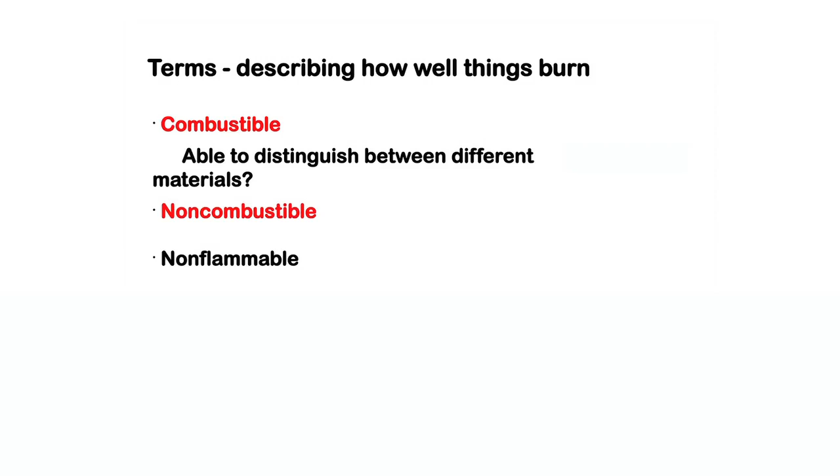So these are some words that people banter about. A material can be combustible. A material can be non-combustible. A material might be non-flammable. A material might be called fire resistant, ignition resistant, and with ignition resistant we have ignition resistant material and ignition resistant construction. Are those the same thing? And then this flame resistant.

What else have you heard in terms of describing the performance of a material to fire? Are there any other terms? Fire retardant. Fire retardant material. Fireproof material. What do these things mean?

So some of these you'll notice are highlighted in red, and the ones that are in red have definite definitions for these terms. The other ones, non-flammable, you might say, well, that's the same as non-combustible. But is it really? Because actually the definition of non-combustible allows some flaming. So maybe not. And then flame resistant, well, you sort of understand what that means, but when you look at multiple materials, how do you know what attribute to give to a given material? So we're going to talk about these a little bit.

Okay, so here's a question for you. Fire resistant and ignition resistant mean the same thing. False. Fire resistant and ignition resistant mean the same thing - we'll talk more in detail about this, but fire resistant and ignition resistant don't mean the same thing. They're different.

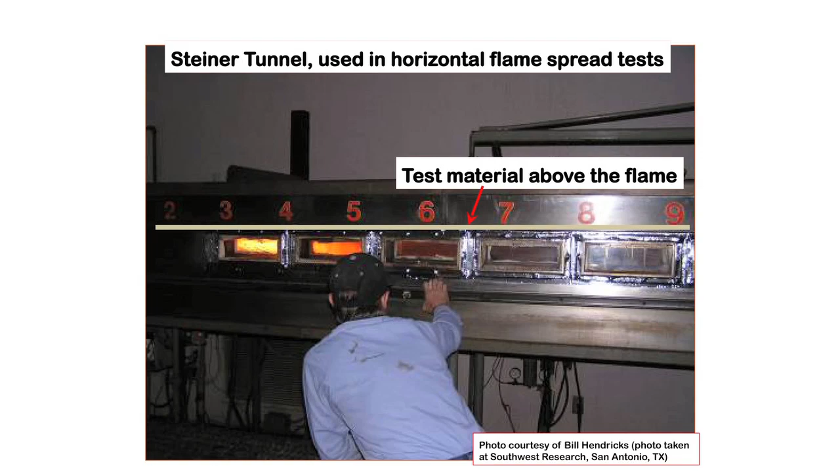This is also the test that is used to determine whether or not in California, and other people are picking it up, they've defined ignition resistant as also something that is developed in this tunnel. So something that is ignition resistant has performed in a certain way in this tunnel, and something that is Class A has also performed in a certain way in this tunnel.

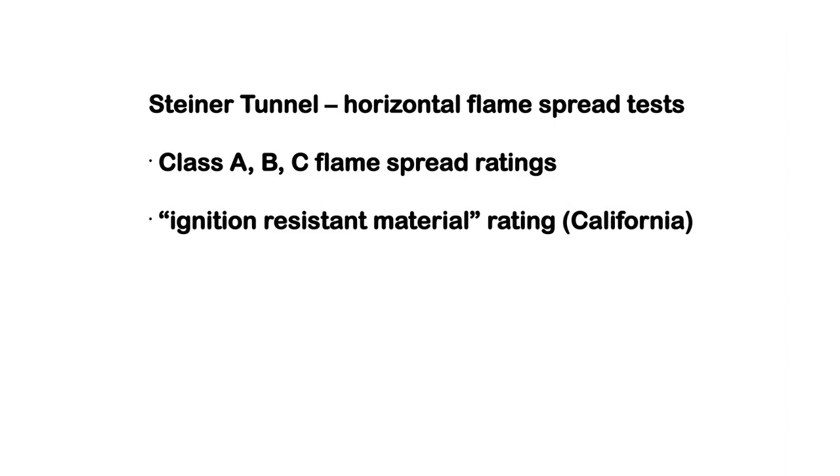Class A, Class B, Class C are commonly used terms. This is a way to evaluate sort of the combustibility of combustible materials, and it is used to get to whether or not a material can be considered ignition resistant or not. So flame spread rating, Class A, B, or C are common, and then in California and to some building code definitions, ignition-resistant material is also determined using this tunnel.

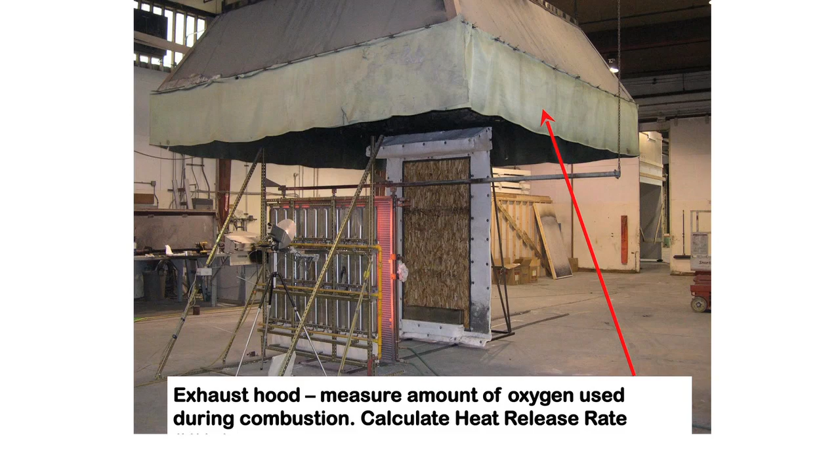So if the energy release, or heat release rate, is 1,000, comparing to a material that has a heat release rate of 500, then you know that the 1,000 one burns better than the 500 one.

Okay, and then if you have a tinier thing to test, this hood is for larger items - you can put components, or things like a large deck underneath it. But if you have a piece of that deck or a piece of siding, you can measure the same heat release rate using a thing called a cone calorimeter.

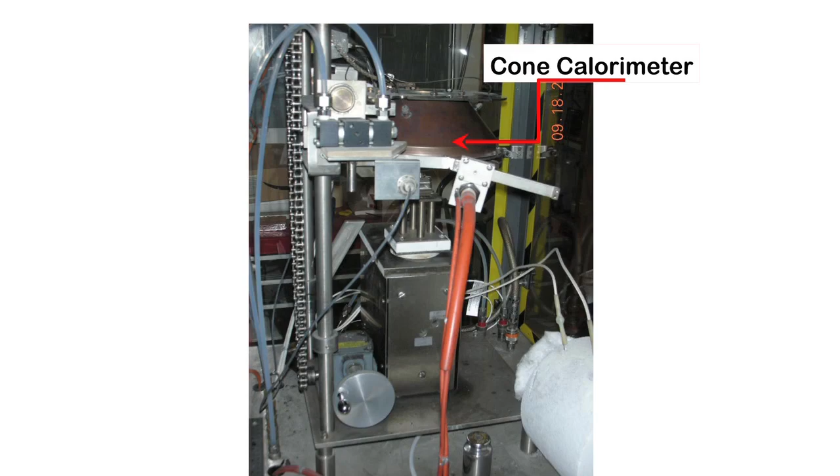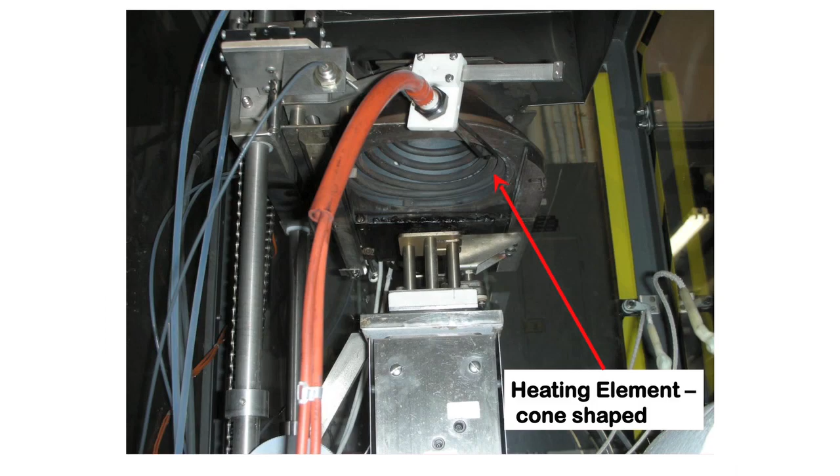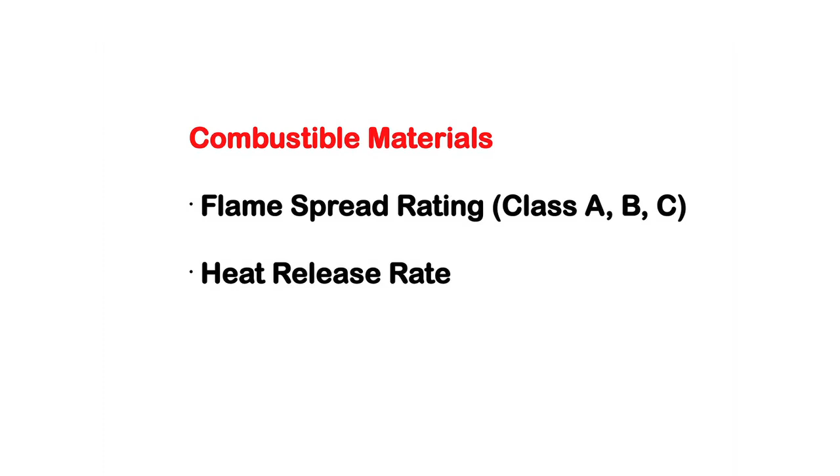So for combustible materials, the way you can evaluate how well a material burns or how vigorously it'll burn is by comparing flame spread ratings - class A, B, or C - and by comparing heat release rate information, should it be available. It's really easy to find flame spread information for various combustible materials, so you can choose that way, and you can also ask for heat release information.

Okay, so fire resistant - that was a term. Fire resistant is used most often for interior fires, and it's a way to describe how easily fire can move from one room to another. It's used commonly in apartments, condominiums, or townhouses where you want to stop fire from one unit going into another unit. This rating is often called a 1 hour rating or a 2 hour rating - it's not really 1 hour resistance, but a nominal rating that provides a relative comparison of how well a given construction resists fire moving from room A to room B.

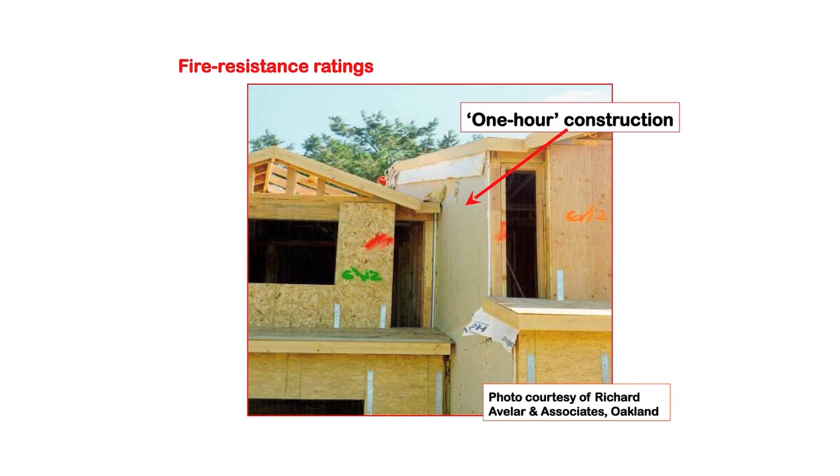So this is a fire-resistance rating, and in order to get that, you have this big vertical furnace, and you put the wall in and run a particular time temperature curve. There's a temperature inside of this furnace, and you look to see whether fire will come through the wall into what would be the outside world or not.

So in a 1 hour test, you're going to reach a temperature of about 1,700 degrees Fahrenheit - it's pretty hot. So this is how you get a fire-resistance rating on a wall.

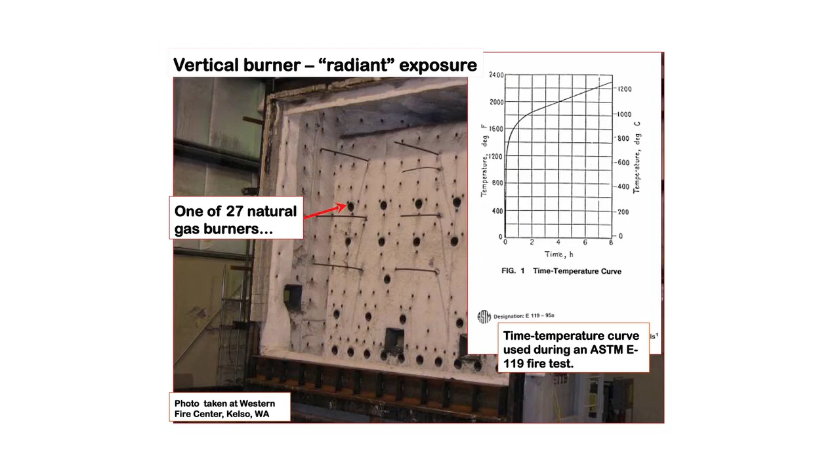You can do the same thing for a door, same thing for a window. And then there's a horizontal version of these furnaces for a floor system. So you can get fire-resistance ratings for movement vertically and horizontally in a structure, and you get this X minute or X hour rating - that's how you read these. So for a door or window, you might have a 20-minute door or window, and for a wall or a floor, you can have a 1 or 2 hour common rating.

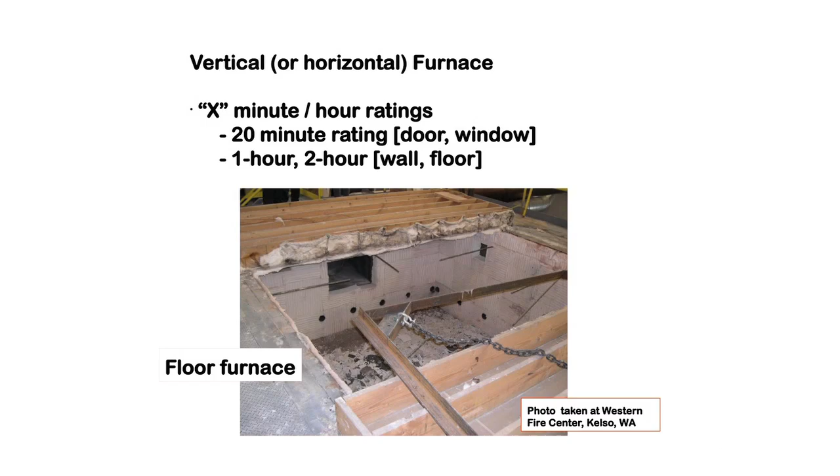So this doesn't apply directly to wildfire situations, but many people are adopting 1 hour wall construction for exterior walls in wildfire situations. So if you have so-called one-hour wall construction for your house, you would have the siding on the outside, and then somewhere between the siding and your stud wall, you're going to have gypsum wallboard in that assembly. So even though it doesn't apply directly, it is used in defining acceptable products or assemblies for wildfire exposures.

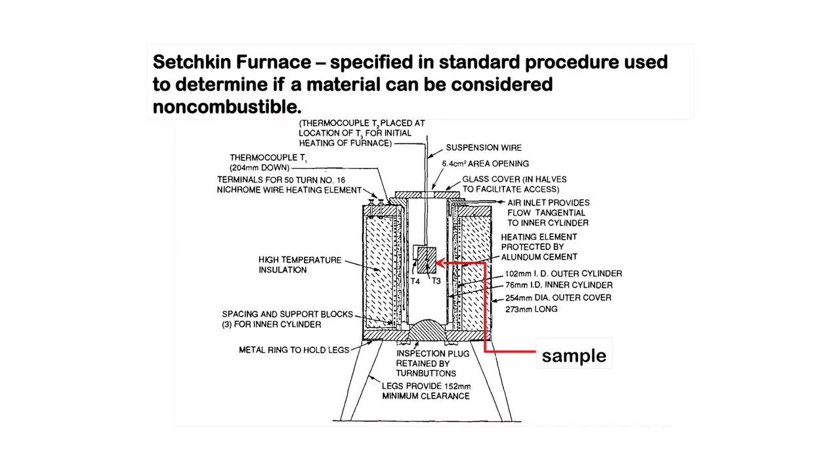This is a particular kind of furnace used to determine whether or not a material can be considered non-combustible. There are certain things you feel in your head are non-combustible, like lightweight concrete - you might think that's non-combustible. Stucco, you might think that's non-combustible. But fiber cement, people think it's non-combustible, but the fiber in fiber cement is a wood fiber, so really it's sort of a function of how much is in there, maybe.

And so they would use this test, for example, to confirm whether materials are non-combustible or not. The definition says - you might think the definition is a material that isn't capable of igniting and burning. Sound about right for non-combustible?

The definition says that you can have a limited amount of flaming, a limited amount of weight loss, and as long as you meet the definition, you can be considered non-combustible.

Another kind of fire-resistance rating is used in roof coverings. This is a test of a roof section used to get the Class A, B, or C roof rating. Class A, B, or C roof rating is not the same thing as Class A, B, or C flame spread. They use the same terms, but refer to different things. When you're talking about a roof and hear Class A, it's this test. When you're talking about almost any other kind of material and hear Class A, it's a flame spread rating. There are 3 parts to a roof test.

The one we're looking at here is the brand test, and what we see in this particular test is this Class A brand. It's a 12 inch by 12 inch piece of material with a sandwich construction. It's 3/4 inch square Douglas fir sticks that are nailed together. The middle layer of the sandwich is perpendicular to the outer layers, so you have a lot of holes in it.

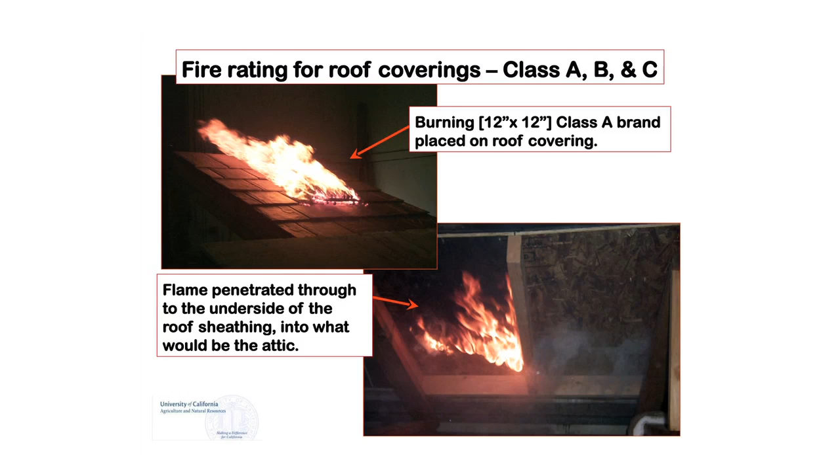It's porous. You ignite this, put it on the deck, and wait to see whether by the time this burns out, or the burning activity on the roof stops, fire doesn't penetrate through the deck into what would be the attic. If fire does penetrate through the deck into the attic, then you don't have that Class rating. So this is the Class A.

This is a Class B. Somewhere in transit, the Class C went missing, but the Class C brand is about the shape of an ice cube. It's pretty small — you put 20 of them on the roof — but it's still a lot smaller than the A or the B. So this is the Class A, B, C test.

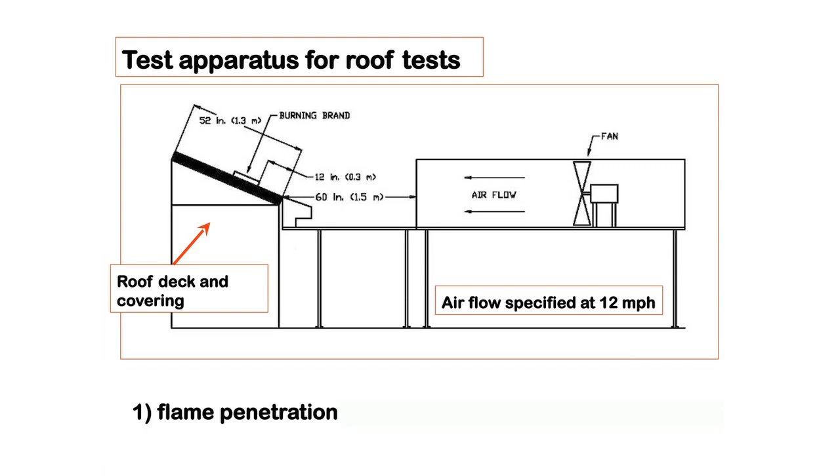There are 3 parts of this test. Part 1 is this penetration test, which is like the fire resistant test — how well it can resist fire penetrating into the roof, into the attic. Part 2 is a flame spread test over the roof covering, and part 3 is whether or not the roof covering generates embers. You have to meet all 3 parts to be Class A, B, or C, with certain requirements for each class.

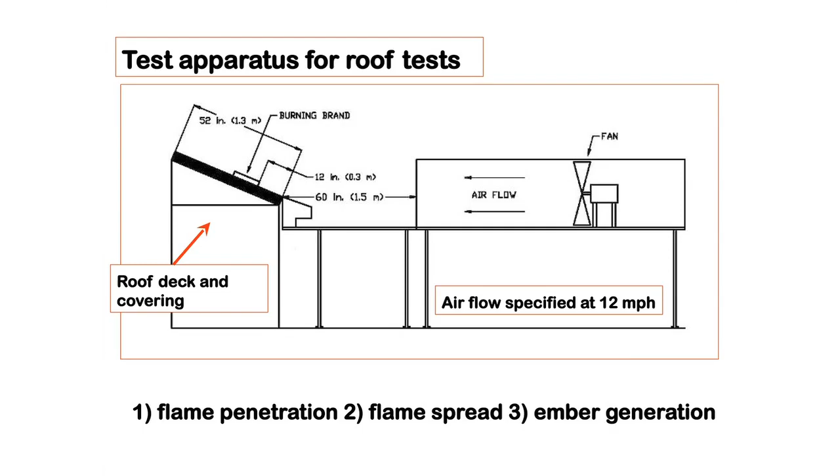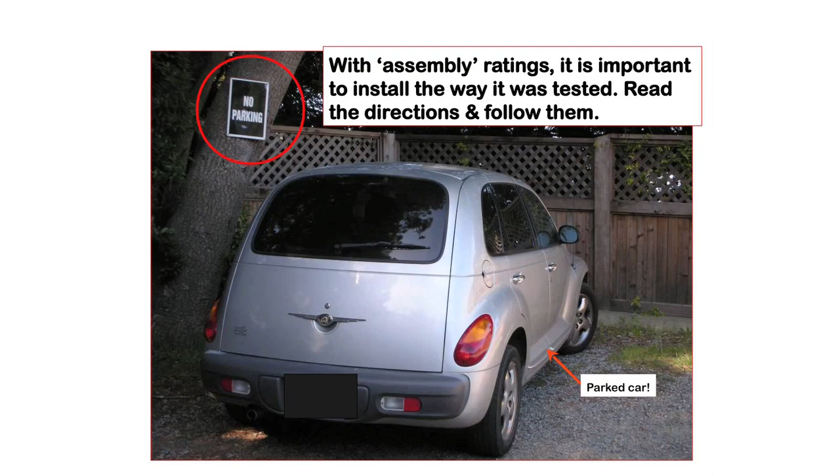Okay, so we're going to review this a little bit. Fire-resistant ratings are nominally used to describe resistance to fire movement from one room to another, from one space to another space. It's used in wildfire to define the resistance of fire moving from the outside in, but traditionally this has been interior space to interior space. You get a 20-minute, or 1 or 2 hour rating for a wall, floor, or other component.

Non-combustible, there's a test to describe whether it's non-combustible or not. Things you have a question about, you should be able to ask the manufacturer. They should be able to tell you and show you test results about the non-combustibility test. It's a particular standard method, and it'll indicate non-combustibility via this test method.

Ignition-resistant material incorporates this: it has to be weathered according to a certain standard and then pass this flame spread test. There's a particular way this has to be tested, and if it passes, this is a go, no-go kind of test. It either is or it isn't ignition-resistant material.

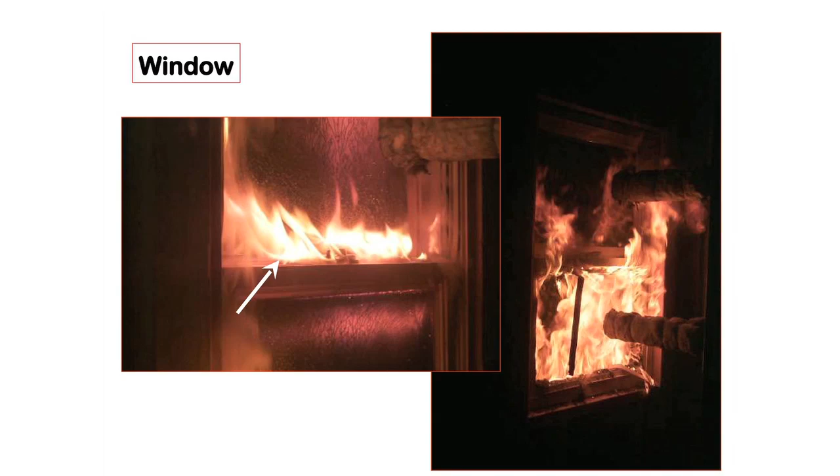In the window test, you put a window in the middle of the wall and expose it to fire from a gas burner at the base of the wall. What you're looking at in each test is whether, during the prescribed time, fire penetrates through the wall, eave, or window into the stud cavity or living space. If it does penetrate, it doesn't pass, it can't be used, it won't comply. With a window, it can break the glass and get in, or burn through the frame and get in. Either way, the key is whether it gets into the living space of the structure.

Okay, so these explicitly allow combustible things. It evaluates the resistance to penetration, so it's more or less a fire-resistant test.

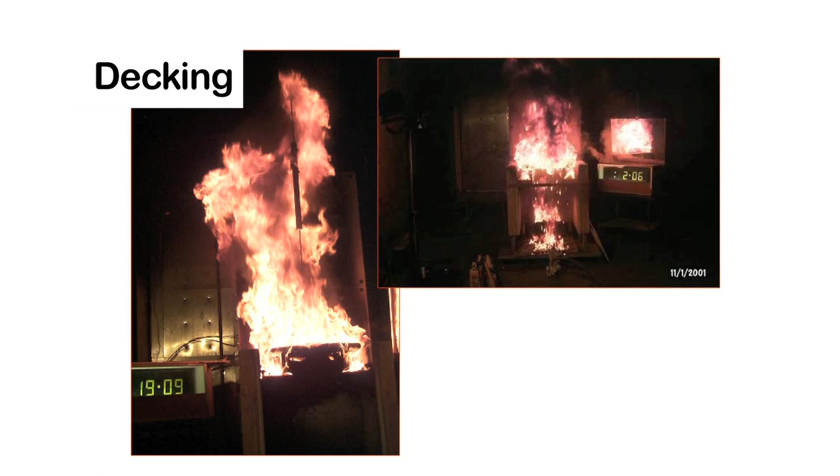Part of this test is also whether it'll put itself out in a prescribed amount of time after the fire exposure. This deck is exposed to a flame from underneath for 3 minutes, and then you wait and see what happens. You measure the energy released, make observations on whether things fall, and then make observations into whether the deck self-extinguishes.

So these things are tied to the state code. If you pass these tests, you can be put in this book. If you become an ignition-resistant material by passing that flame spread test, you can get yourself put in this book. And this also allows for assembly, so if you need to use gypsum wallboard, for example, to pass the test, then you need to be installed that way, but you can pass the test and be put in the book. So if you understand the limitations of this, it'll help you think about what kind of materials to get. Now let's look at your home.

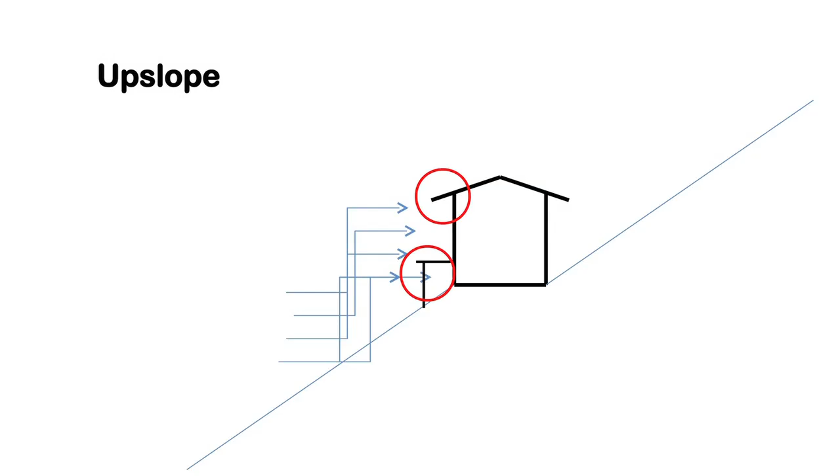Think about your home on your plot of land. There's the slope and whatnot around your house, and then there's your house itself. We're focusing on the house itself, but if you're on level ground, your exposure might be one kind. If you're on a slope without any setback, and the fire can come up the hill at you, with an overhanging deck or big eave, you need to think about these particular components, because they may need special treatment to reinforce your house, given how it's set on the property. If you're set back, it would be less severe exposure potentially, but you still may have some vulnerable parts.

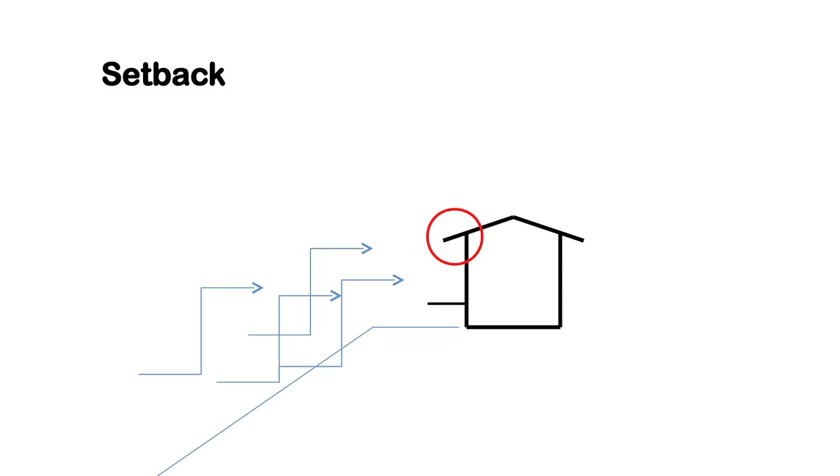Similarly, the other option would be a downslope fire, running downhill towards you. This one might be more of an ember kind of exposure, depending on your setback and your defensible space.

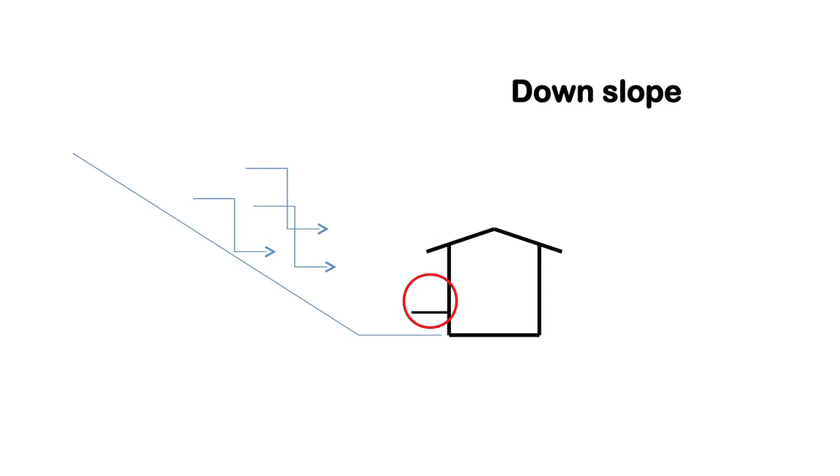One thing you can consider, if you're on a slope, is using hardscaping features like a retaining wall that might stop the fire short of your building. So you might only need to worry mostly about ember exposure instead of the fire coming all the way to the house.

So it's pretty clear in my mind that the roof is the most important part of your house, because it's the largest horizontal surface. It's ready for all comers in terms of embers and whatnot. It's vulnerable. So a Class A roof, in my mind, is where you want to be.

But there are other things about your roof you need to worry about. This is something I call a complex roof. Here you have a Class A roof covering, but you have things around that Class A roof—in this case, a roof-to-wall intersection. What's the siding? You can probably tell, it's wood shingle—an untreated wood shingle siding. So what has accumulated in back of that shingle-clad wall? Leaves and such. And what else can accumulate there during a wildfire? Embers. So you have a Class A roof, you could feel safe, but because of this particular design, you shouldn't feel so safe.

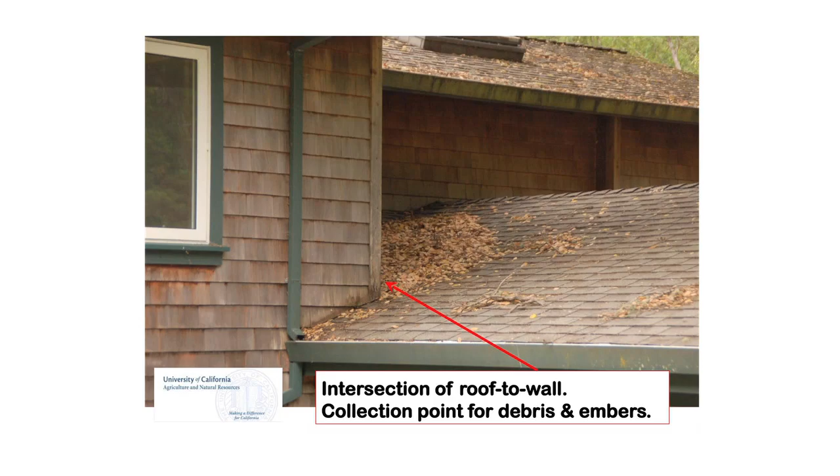So if you have a house like this, you can feel good about the roof, but you need to do other things. You could decide to keep that roof clean all the time, or you could do something about the siding so that it gives you the same relative performance as a Class A roof does.

So you could replace the siding. You could put in a non-combustible siding, or something that meets the ignition-resistant material classification. Replacing all the siding on your house could be expensive. You could replace locally—no one sees that side anyway, particularly. So you could locally replace with something more fire-safe in this particular case, because of this particular design and the way you have it there.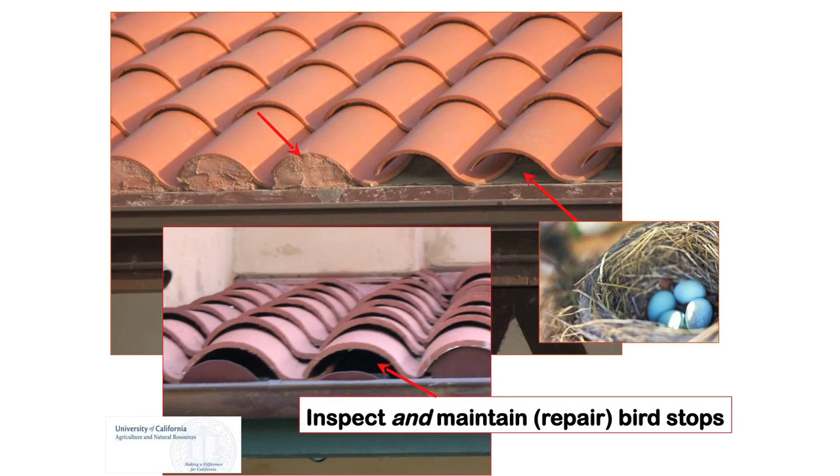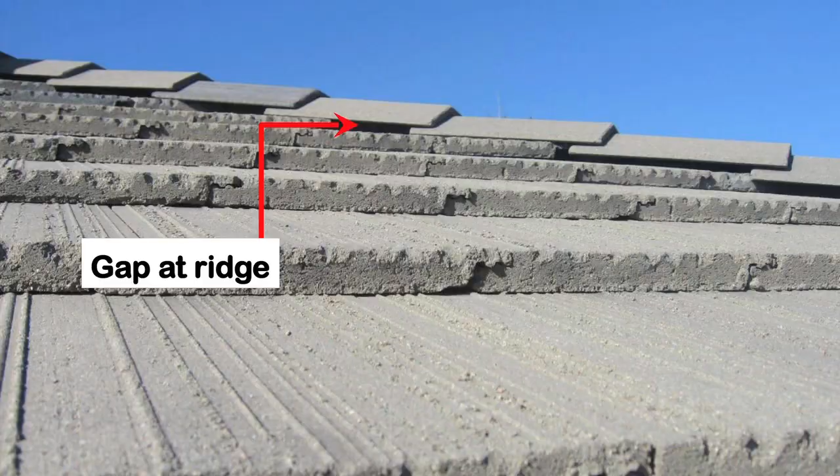Debris can blow up under there. Birds can climb up into there, and rodents can climb up in there and build nests. There's a lot of fine fuels in nests. Embers will also flow up under there and ignite those fine fuels, which will then provide a flame contact exposure to larger structural members in that construction. This is a flat concrete tile roof.

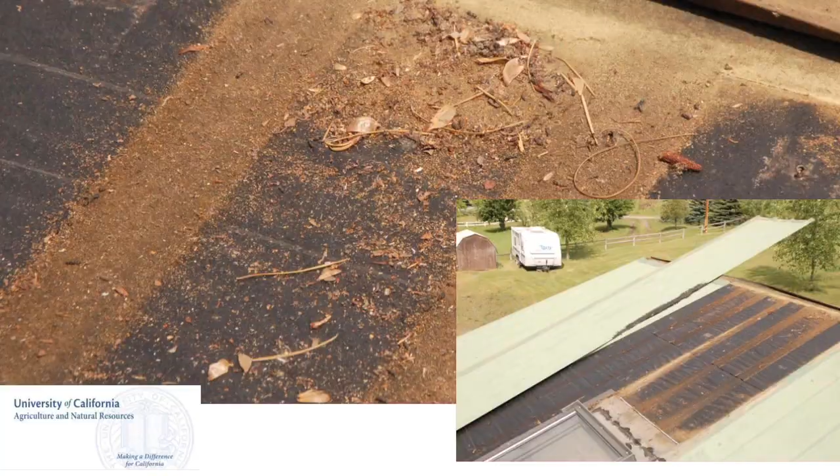You can have gaps at the ridge also, so just because you don't see anything at the edge, an edge happens at the peak too. This is a close-up of debris that accumulated on this building over probably 15 years of use, where we took this off to waterproof the skylight, and this is what we saw. So there's a lot of debris that can accumulate over time.

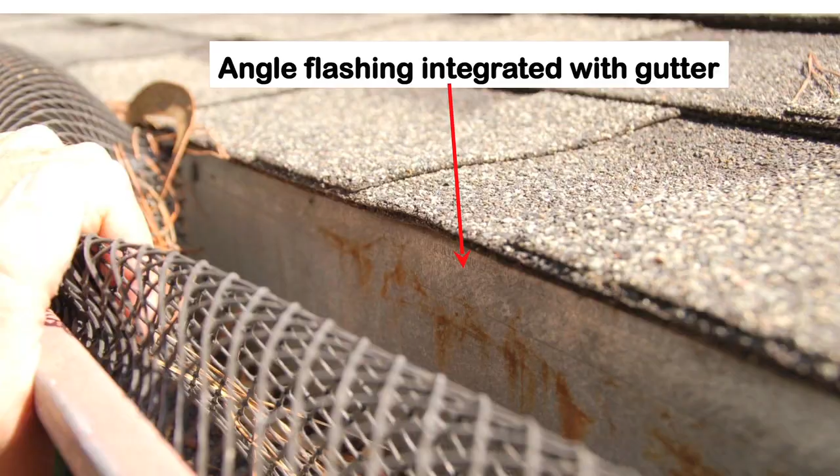So what's the solution here? You guys have to come up with a solution. You don't have any gutters - what's another solution? Another solution could be gutter covers. People are doing that, or you could do a really good job of keeping debris cleaned out of your gutter. I don't even like that idea.

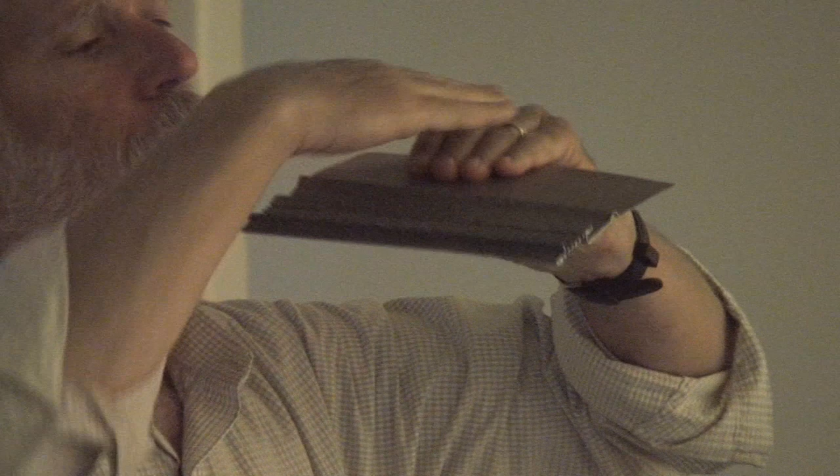I do have some examples of gutter covers. There's a wire screen kind, like this one, that you slip underneath the edge of the roof. The water can come in - the idea is that water comes in but debris doesn't, so water gets into the gutter and out. This is a combination solid screen type: the upper part of the gutter cover slides underneath the roof, water comes off the roof and goes into the gutter, and debris supposedly flows off. If you do a web search on gutter cover devices, you'll find many.

I have maybe 15 or 20 in a spreadsheet, and if you go to their website, every one of them is the best gutter cover known to man. Right now there isn't an independent way to evaluate performance, so you have to think about how well you think it might work, remembering that many of them will allow debris to accumulate in back of the roof, and then take appropriate steps.

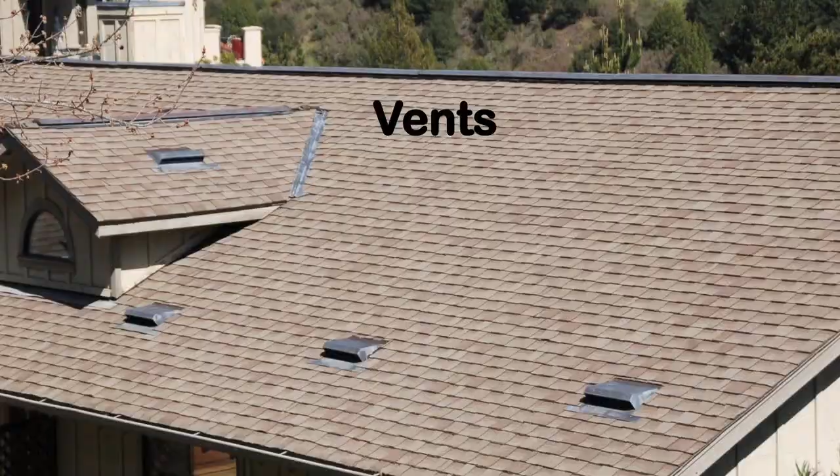So, vents. We talked about this a little, but this is a roof, and here at the base of the roof there are through-roof vents that would be inlet vents, and then we have a ridge vent at the top that would be the exiting or outlet air vent.

Vents provide a moisture management function for the home. Enclosed spaces that are typically unconditioned are typically vented. So if you're built on a crawl space, you're going to have crawl space vents. If you have an attic, you're going to have a vented space there. If you have a cathedral ceiling, you could have venting depending.

So here's the idea that you have inlet and outlet in each space - if you have a foundation or crawl space, you're going to have air coming in and air going out. Theoretically, dry air comes in and more moist air goes out.

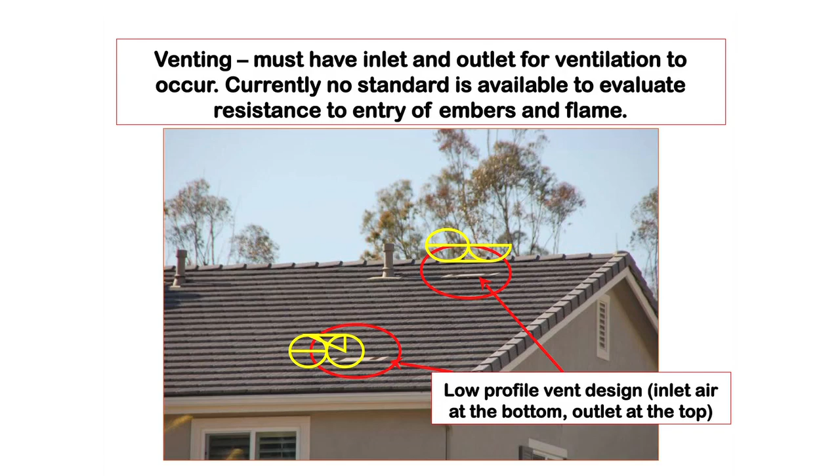From a fire perspective, vents have been shown not to be so good because they allow embers or firebrands in, which then ignite fine fuels in the attic. How many of you store stuff in your attic? I take it they'd be combustible things like newspapers, magazines, or memorabilia. Even if you don't, a lot of debris can accumulate over time, just like in that under-roof area we saw.

Some testing we've done and some testing done at other labs has shown that depending on the combustibility of the fine fuel and how fine the fuel is, you can have fairly small embers igniting that fuel. Then the flame from that small fuel fire provides flame contact exposure to the larger structural members in the attic, and you end up having an attic fire.

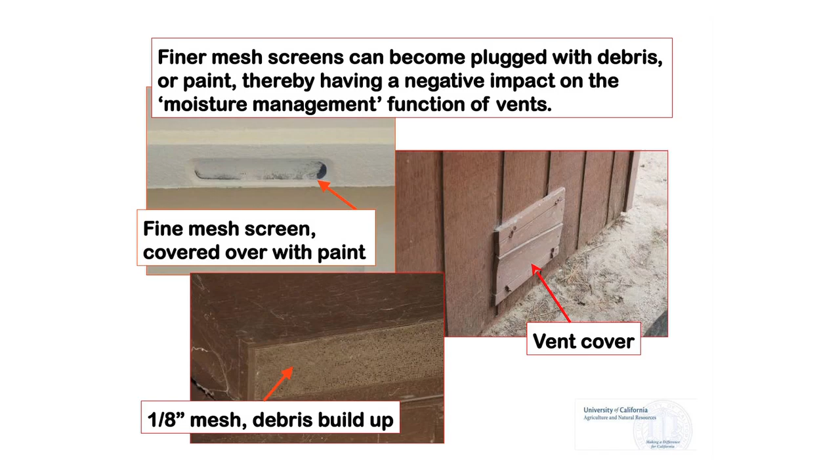One thing is for sure: finer mesh screen is better, but finer mesh screen is easy to plug up. Here we have 1/8 inch mesh screen; commonly these days 1/4 inch mesh is pretty common. The code now allows 1/8 inch mesh, and in California the code will allow 1/16 inch mesh next year. But here's 1/8 inch mesh screen, and you can see there's a lot of debris plugging up these openings. This is a 1/16 inch mesh screen, and it's been painted over - if the screen weren't in such poor repair that it's torn out, it wouldn't have much air entry capability at all.

So finer mesh means more maintenance for you. Finer mesh means smaller embers and less likelihood of ignition in the attic for you also, so you can go that way. You can also develop or pre-make vent covers if your vents are easily accessible - put them on when wildfires are threatening, and take them off when they're not.

So Ed asked whether you're going to still meet the ventilation code requirements if you use finer mesh screen. This is one question that I anticipated, so I have some slides that we talk about that.

Before we do that, you can find them in the Tahoe Basin in particular. There are newer vents that have been designed and are now produced to resist flame and ember entry. These are a lot more money than quarter-inch mesh screen, but here they are. The two most common, I think, are one called Brandguard that uses a baffle design, and another called Vulcan, which uses a combination of screening and an intumescent paint-coated honeycomb mesh.

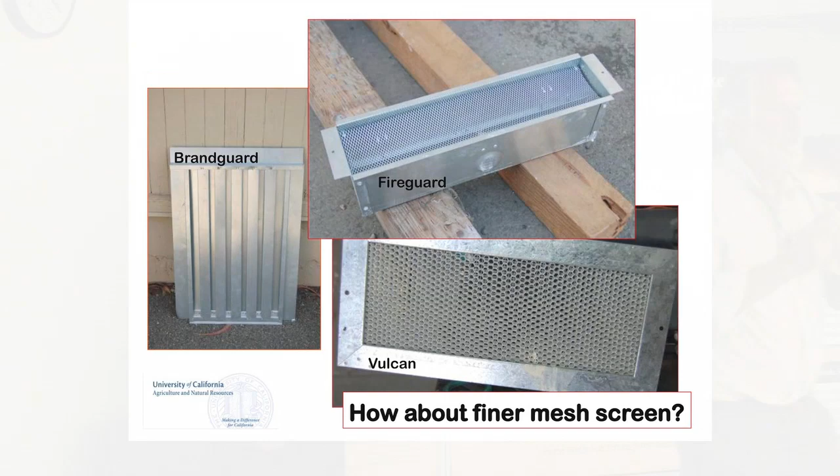So from your perspective, you need to think about how these might work under ember exposures separately from flame contact exposures. The Vulcan vent, for example, works because the intumescent paint swells up when it reaches a certain temperature. Most of these kinds of products, and this is no exception, will activate at 325 to 350 degrees Fahrenheit. So if it sees that kind of temperature, which is typically a fire kind of temperature, it'll swell up and close off the vent.

If it stops embers by doing that, then you don't really care for that, because an ember can come at your house and the temperature won't be 350 degrees Fahrenheit. It would be something a lot cooler than that.

Are these eave vents? These vents are all kinds of vents. They are eave, gable end, foundation. Many of them have designs for a dormer type of vent, a through roof vent. They are not a ridge vent, but almost any other kind of vent on a house they can be.

So foundation vents have been approved as passing the testing so far? Yes, the design and size have been accepted. You can't use the word approved, because approved means there's an accepted standard to test to and they passed it. If there isn't an accepted standard test method, then they've been accepted for use until. And once that standard has been approved and the state accepts that standard, then these vents will have to retest to whatever the standard happens to be.

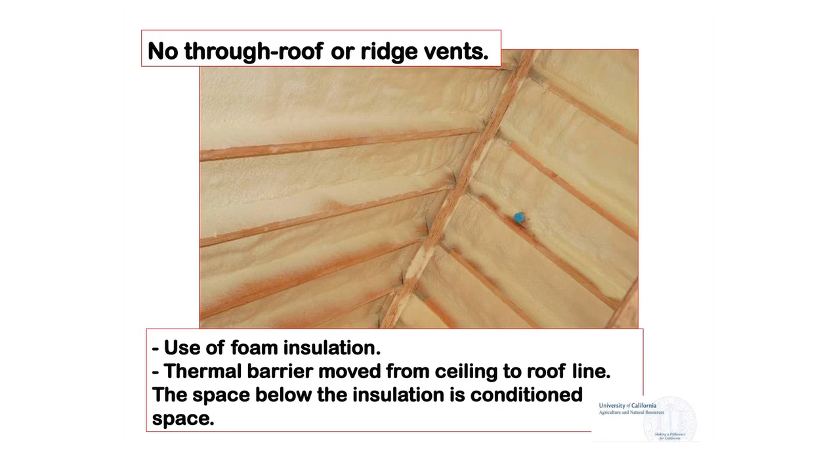So this is just a comment on unvented designs. You don't have vents. You move the insulation layer from the ceiling to the roof line. You do away with vents. This is something that's easier to do in new construction. It's easier to do in temperate climates. It's harder to do in colder climates. But it is an option, and you end up with no vents.

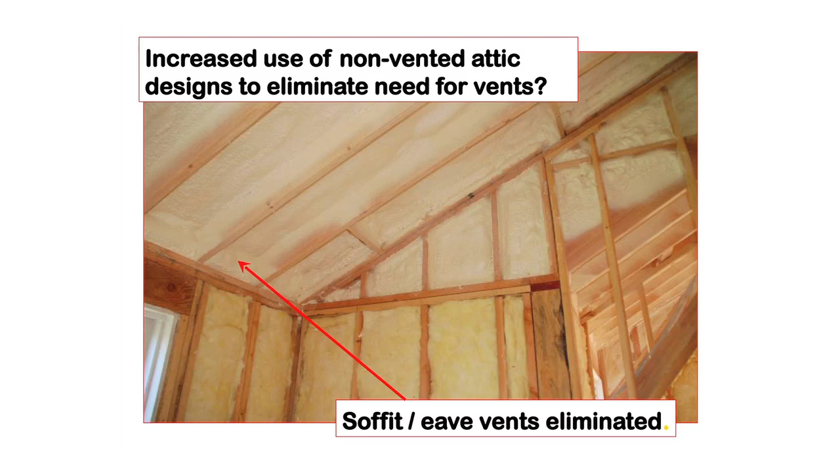Depending on where you happen to be, the building official will be more or less likely to like it, and so therefore more or less likely to approve it.

Okay, so this is Ed's question: what happens if you put a finer mesh screen up? So I'm going to just do this as an exercise. You can think about how to do it on your own house.

Back in the late 80s, I was doing mostly moisture-related research, and I did a study on the moisture content of wood framing members in crawl spaces. This is a diagram of a very simple layout of a real house in Richmond.

Every place with a red circle was a vent. There were vents on 3 of the 4 sides. Theoretically, you should have vents on every side so you can have cross ventilation, but there were vents on 3 sides. Each vent was a 5 inch by 12 inch opening.

The code says for a crawl space, and it's a little different for an attic, you need 1 square foot of vent area per every 150 square feet of floor area. The same rule applies for a roof. For attics, it's usually 1 square foot of vent per 300 square feet of ceiling area, of horizontal area.

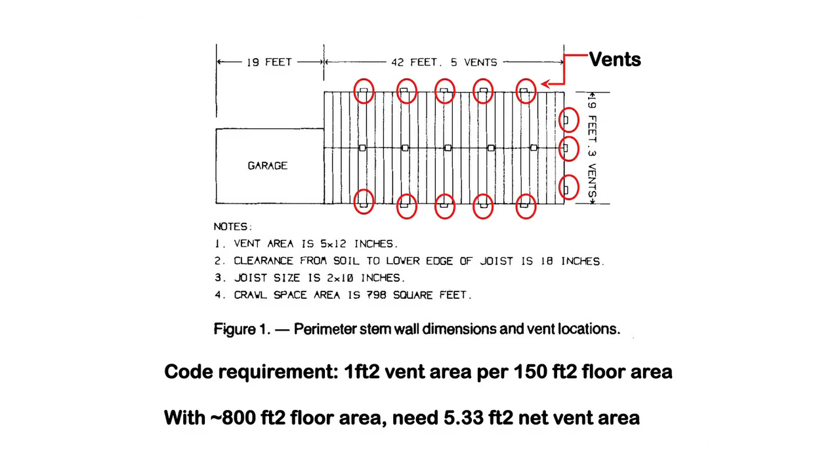Maybe we can pass these around, but the way vents work, here's a 1/4 inch mesh screen, here's an 1/8 inch mesh screen. You'll see that wire to wire, in both cases, the wire takes up space. So you have to subtract out the part of the opening that is taken up by wire.

When you're looking for this 5 1/3 square feet, you want wide open - it's called net-free area, so no wire in that area. 1/8 of an inch takes up more space than 1/4 of an inch. The other thing you're going to notice is that the finer the mesh screen, the finer the wire.

Okay, so that's sort of a good thing. If you use the same wire diameter, then finer mesh, you would end up with less net free area. Okay, so you've got that handled. And 1/16 of an inch mesh has a finer wire diameter yet.

So this is indeed what happens. If you want this kind of information, just let me know - I have a business card here you can pick up, and I can send you this little spreadsheet. You'll notice, 4 mesh means 4 wires per inch, so 4 is the same as 1/4 inch mesh. 8 is the same as 1/8 of an inch, and 16 is the same as 1/16 of an inch.

You notice that the wire diameter gets tinier. The opening distance, edge of wire to edge of wire, changes. And if you were to calculate this all out, you would get the percent of the opening that you get in terms of net free as a function of mesh size and that related wire diameter.

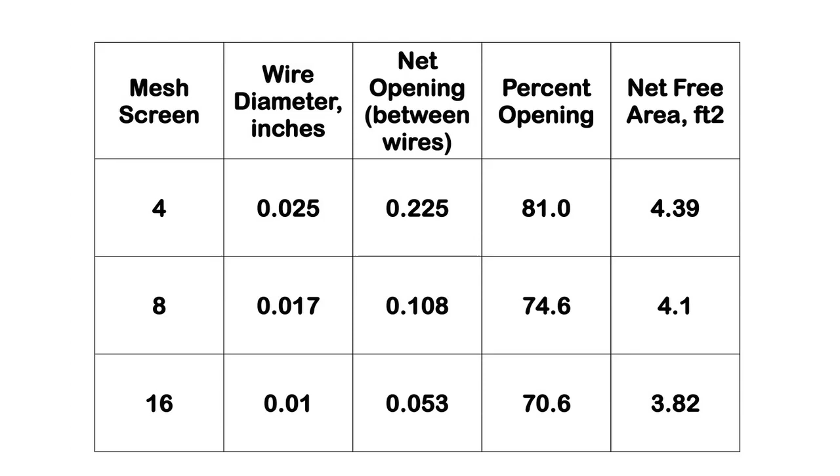So with 1/4 inch mesh, 81% of that opening has no wire taking up space. 1/8 of an inch, it's roughly 75%. And then 1/16 inch mesh, it's roughly 70.5%. That gives you a net free area. If you take 81% times the total opening, which was 5 1/3 square feet, you can get how much you have. So you notice that in this house, you didn't meet the code requirement ever.

So what building officials might do, and what you can calculate - because actually, if you're building a new house, they're going to care about this. If you do this as a retrofit, they may care, but they may not know.

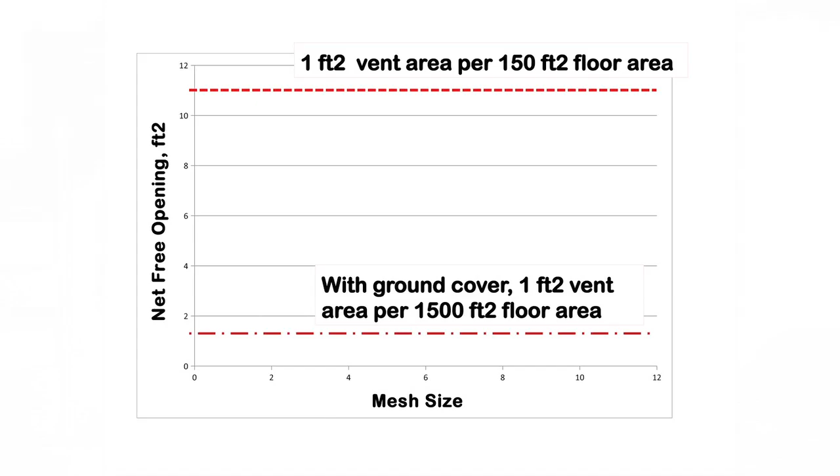You would just have to bump up the number of vents in order to get the total amount of net free area to meet code. This lower dotted line was the impetus for that research project back in the late 80s we've been talking about. If you have a crawl space and lay down plastic, you can get away with less vent area, going from 1 square foot per 150 to 1 square foot per 1,500 square feet. So you met that requirement in every case if you had laid down plastic. As a ground cover, it minimizes the amount of humidity and moisture getting into the air, and therefore you don't have the same moisture content problem potential with the wood framing.

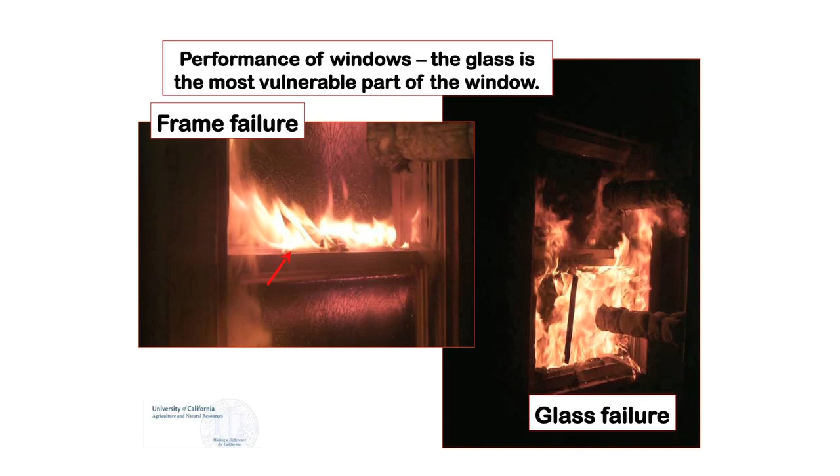The kind of exposures that might cause glass to break could be a radiant exposure from a large bush near but not touching the house. Or if your neighbor's house is close and it ignites, that would be a long exposure, and depending on how close the house is, you could have enough radiant exposure to cause the glass to break. Once the glass breaks, either flame enters or embers enter and ignite things inside.

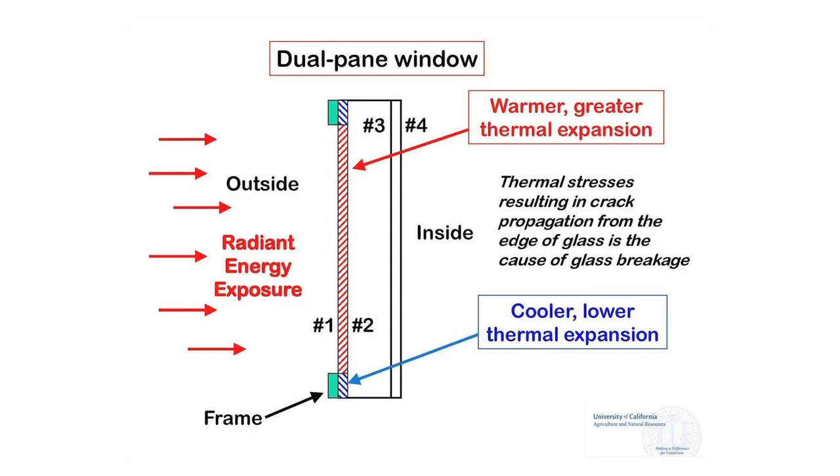So that's how it breaks. A lot of studies have shown that the most important part of your window is the glass, to the point where, with one rare exception, you could be indifferent to frame type and buy windows based on glass. In that regard, dual pane is the way to go. This is one place where energy efficiency and fire performance align. You want dual pane at minimum for energy purposes, and dual pane is better than single pane by a stretch from a fire perspective. Similarly, tempered glass is a lot better than annealed glass from a fire performance perspective.

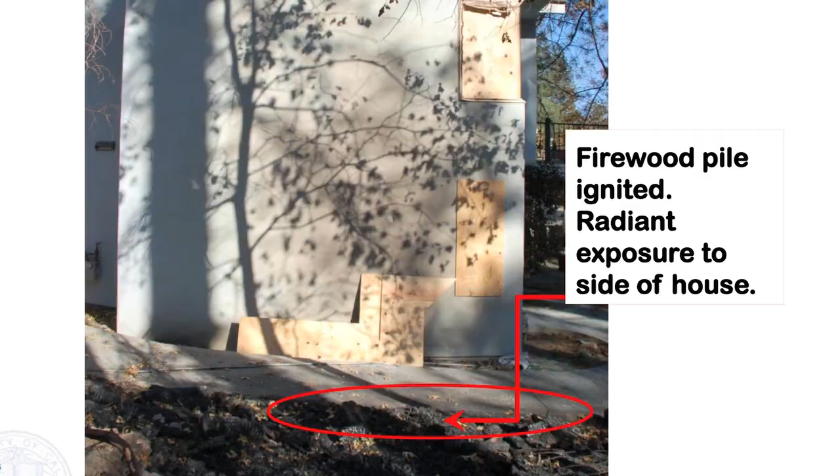So this is an example of a firewood pile that was ignited during a fire, and it was the radiant exposure from this fire that caused the damage we see on this house. Some windows were broken, some were just damaged, but it was largely radiant exposure that did this. This is what you can expect even if the window doesn't fail in terms of glass breaking.

Decks. So what kind of exposures can you expect decks to see?

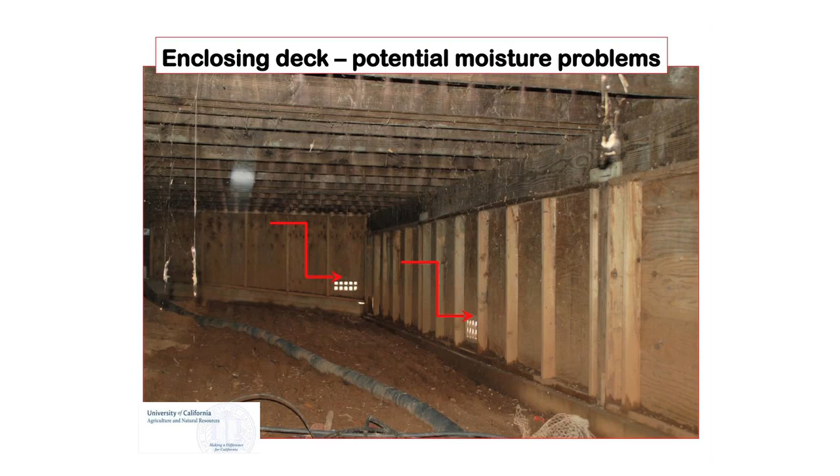If you have this kind of storage issue with your deck and you really have no intention of changing it, then and only then you might want to consider enclosing the deck. If you enclose the deck and you have an open deck board kind of a deck, with gaps where water can go through, and you're in a place where it rains some, then you don't want the deck to develop rot problems because you don't get rid of the water that's going to accumulate in that underdeck area.

So if you're going to enclose a deck vertically in this case, you want to make sure that you've taken care of the moisture issues that will develop over time. And then you want to make sure you're using a material that's going to resist the kind of exposure you're anticipating.

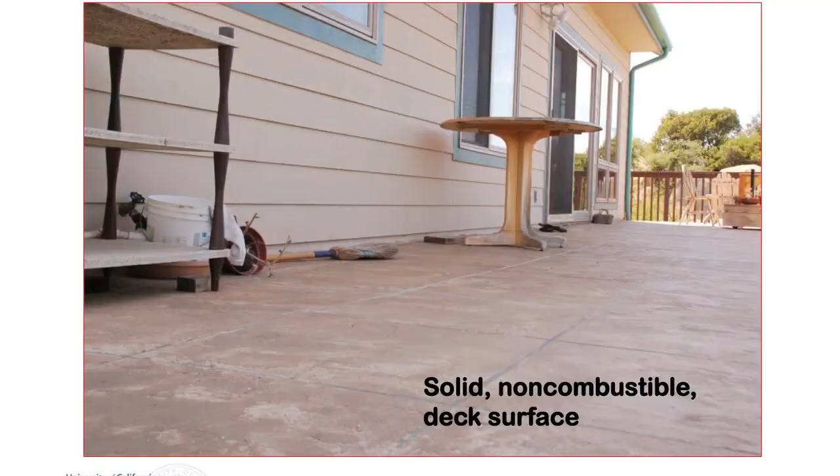So, okay, here's an example of a solid surface deck, a non-combustible product. So this would be no particular problem. In this case, it would be what's stored, what do you have on top of the deck that's combustible?

Patio furniture, wood piles next to your sliding glass door, those kind of things. Brooms hanging on a nail. Those things can ignite and can become a problem even with a non-combustible deck.

And finally, we can talk about the decking itself if you have a combustible decking product. So here, we can say that all combustible decking products are not equal. You have a way to differentiate to some degree how combustible a particular combustible decking product is. And one way is to just look at what's in this WUI product handbook, because it does provide some discrimination.

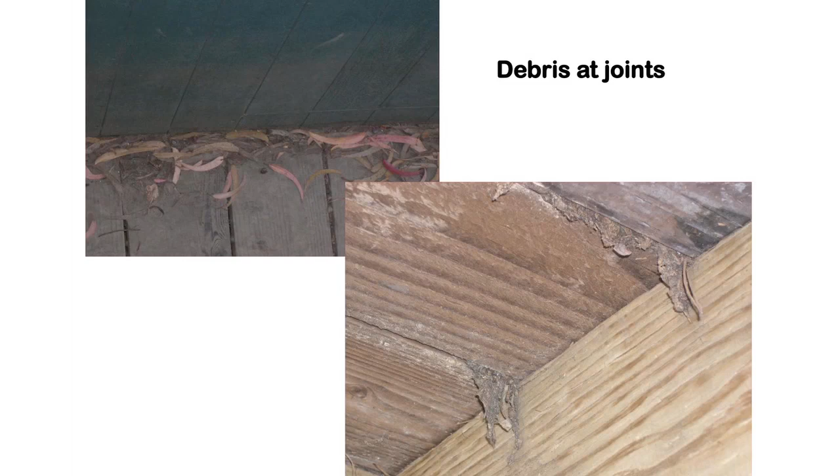So the other thing to really think about is maintaining decks in terms of eliminating fine debris that will accumulate at the wall to deck area that we see here, and then at the deck board to joist crossings. You have a lot of potential for debris to accumulate here, and if embers land there, then you'll have some ignition and potential for the fire to grow larger.

Okay, siding. We talked a little bit about the standard way to test siding, combustible siding, that might be incorporated into the product acceptance book that the State Fire Marshal's Office publishes. And as I said, it is concerned about burn through in back of the siding into the stud cavity, and only that. It doesn't really evaluate flame spread up the wall at all.

And so, this is just something to consider. And what research has shown in terms of the resistance to the penetration at a lap joint is all about the kind of lap joint.

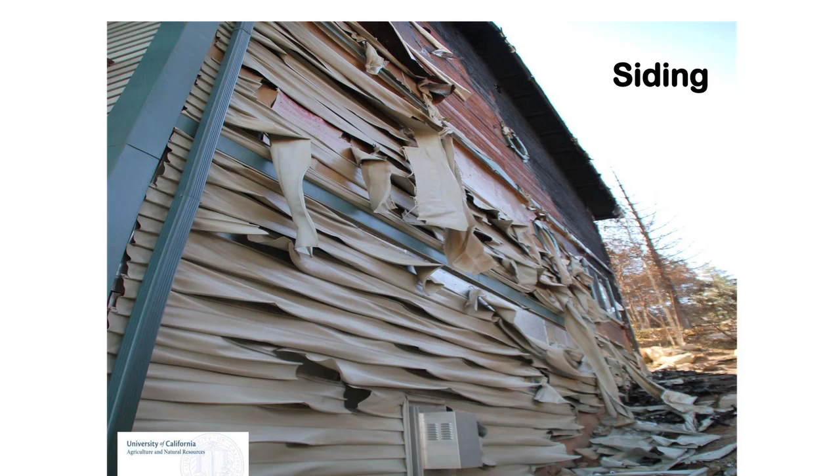So let's see. We have a couple of examples here.

The same thing doesn't apply. It doesn't work the same way with non-combustible fiber cement products. The penetration at the lap joint isn't really an issue under normal exposures, at least with a non-combustible product.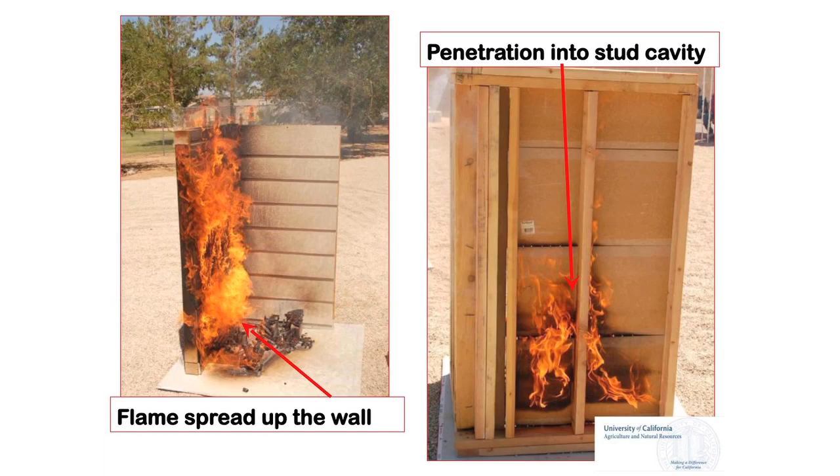So the issue with vertical flame spread up the wall is even if you don't penetrate at a lap joint, you probably sooner or later will have a window in the way or an eave or a vent in the way. And so vertical flame spread is an issue because of the things that it will eventually see.

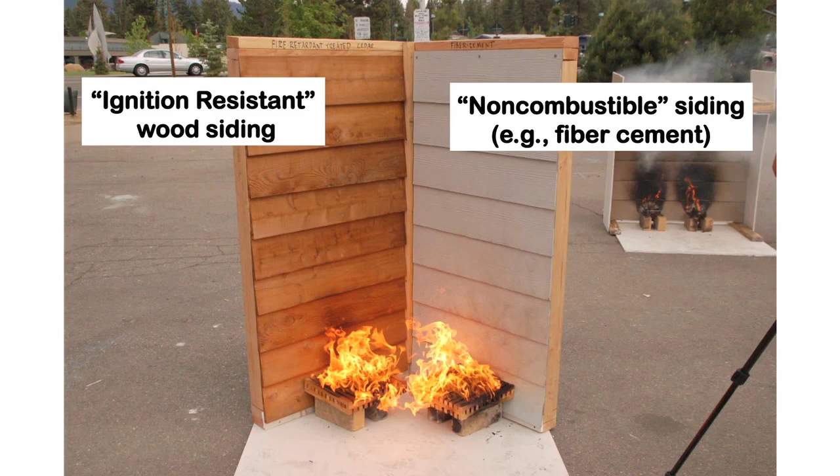So here is a wood siding product that has met, it's a fire retardant treated exterior rated wood siding product that has met the ignition resistant criteria. And here is non-combustible. We're going to just look at this over time. Again, it's an A brand at the bottom.

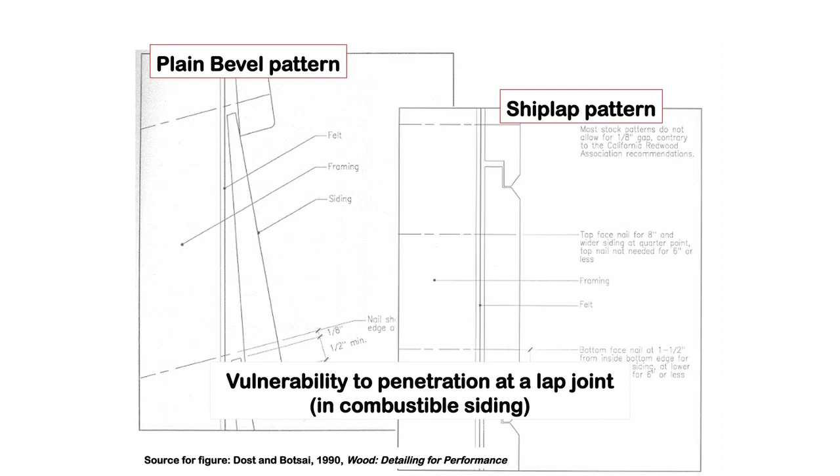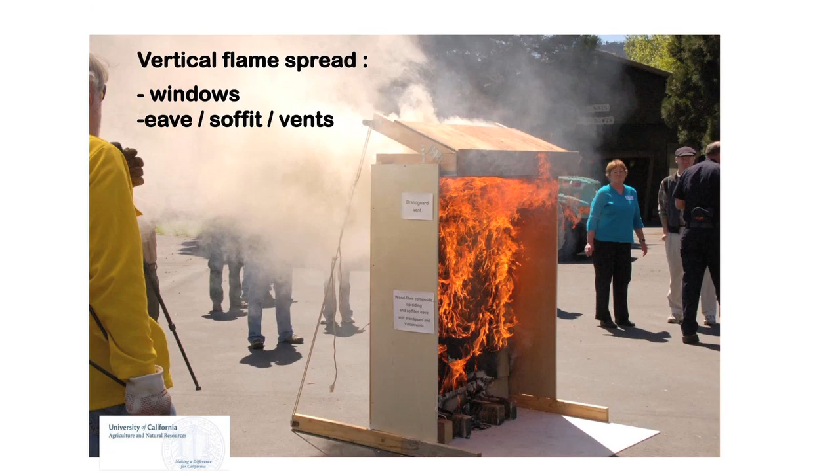As it turns out, this particular product has a plain bevel joint also, but because of the intumescent coating nature, the intumescent quality in this particular fire retardant treated product, that joint isn't as vulnerable either as it would be in a flat out combustible siding product.

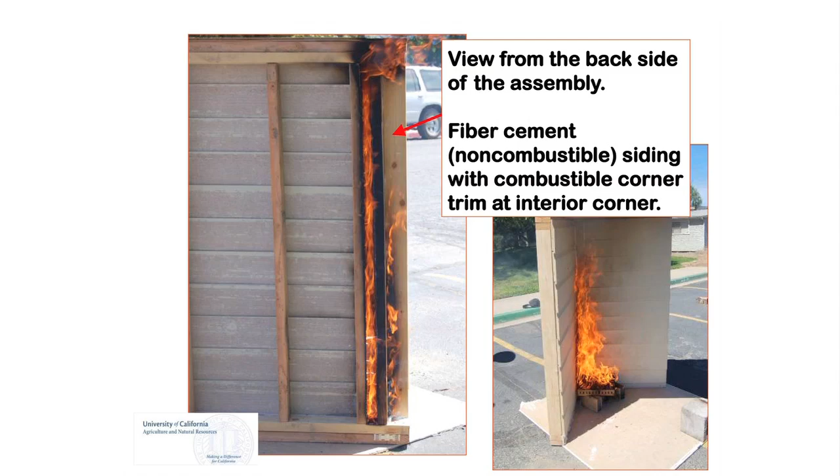So this is just an example on the left. This is a fiber cement siding product and a combustible trim product. This is a reentrant or interior corner where you often find vegetation. If you're going to go through the trouble of having a non-combustible siding product, make sure that the trim gives you comparable performance, because otherwise it'll be the weak link.

Okay, so coatings. There's a couple of things with regard to coatings that I want to cover, and then anything else you want to cover. One is things you might do to your deck that aren't intended to provide any fire resistance, and whether or not it makes it worse from a fire perspective. These would be like stains you might apply because you like the look of a stained deck, or you want to extend the life of the deck and you like the way that the stains do that.

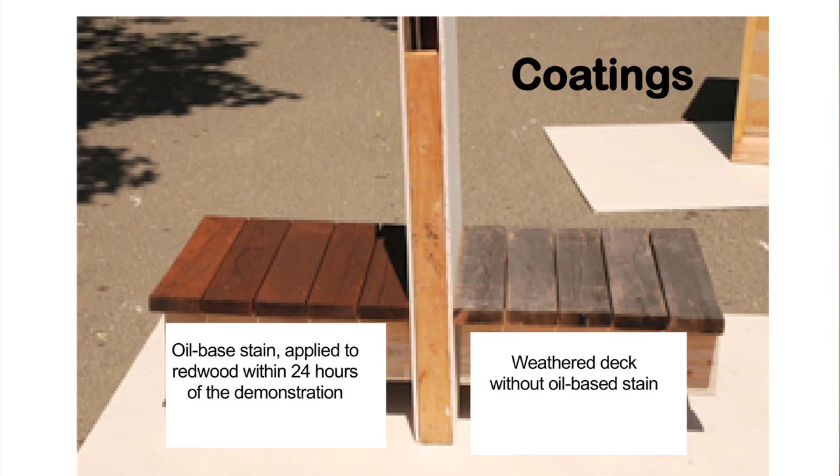One is to describe this process to get exterior rated fire retardant materials, and then other kinds of coatings, and then gels. I want to talk a little bit about gel coatings.

Okay. There is a durable spray or brush-on treatment that will make my wood shake roof fire resistant. I answered false. So let's talk about that.

And I think the key word there is durable. And when I use the word durable, maybe we should have talked about what durable means. Definitely, there are treatments that you can apply to your roof that will improve the fire performance and make it more fire resistant tomorrow, probably even next week. But with some weathering, at some rate, it's going to lose its effectiveness, and you're not going to know when.

So that's the general problem today with most, with most topically applied products used in exterior exposures. They don't weather well, and the chemistry hasn't been worked out yet to make the service life predictable. So in the short term, until these things are worked out, they definitely work in the short term. You don't know how long that term is.

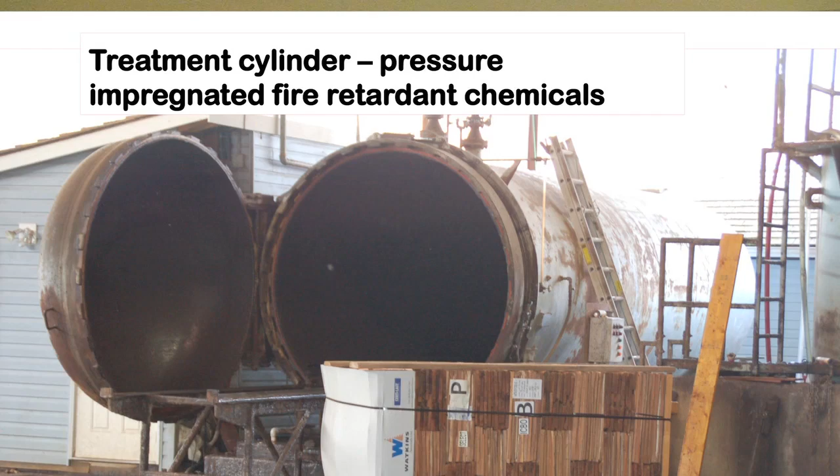Then under a vacuum and then pressure impregnation process, the chemicals get injected into the wood. And then there's another step, a drying step that polymerizes these things and fixes them in the wood.

So in California, anything that's going to be on the roof has to pass a natural weathering cycle and pass the test before it can be sold. And if it's used as a sidewall or decking material with an ignition-resistant classification, it has to undergo a prescribed accelerated weathering test and then pass the fire test. Maybe it's not the exact right weathering test, but it's something you can compare by anyway. So this is how both the roof shake with the standalone Class B rating and the ignition-resistant material undergo the same process. The amount of chemical may change, but the steps are generally the same.

Okay, now let's look at this. I put a stain on my deck because I like the way it looks, and I think it's going to help me have a more durable deck. But I don't want it to degrade the fire performance of it. Will it? So I did a couple of these kinds of tests in some demonstrations.

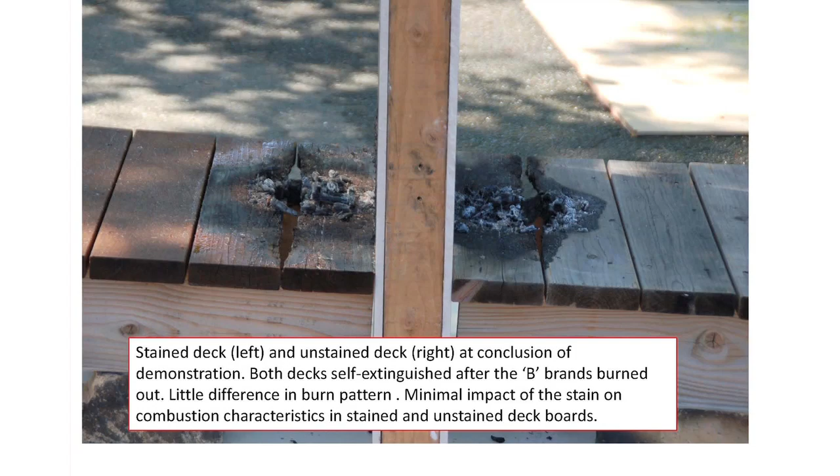This is sort of observational. I didn't measure anything in particular, but they look about the same. What happened was that the stained deck burned more rapidly for a short while, but they both went out at about the same time, and the burn pattern was very similar for the stained versus unstained. The stain is going to fade away over time, so the worst case was igniting right after it was applied. It's not going to get any worse than this, and to me that indicated there really isn't much impact from the stain.

So I don't think you should rely on a coating to give you fire performance, and you shouldn't be worried about it detracting from how it might perform.

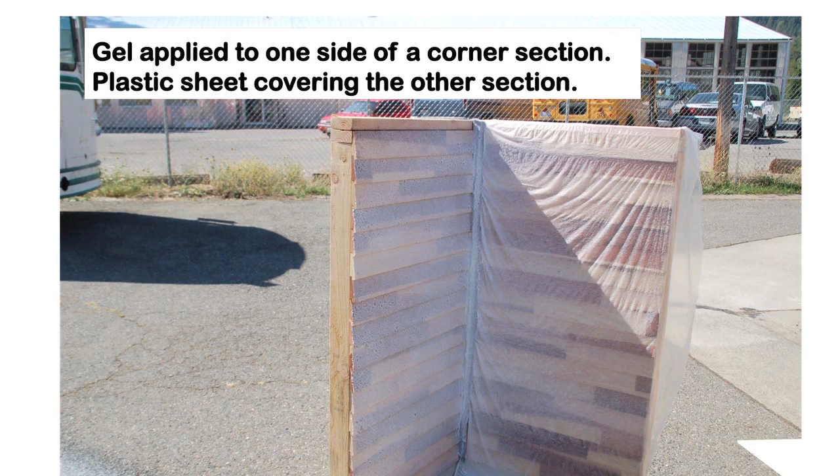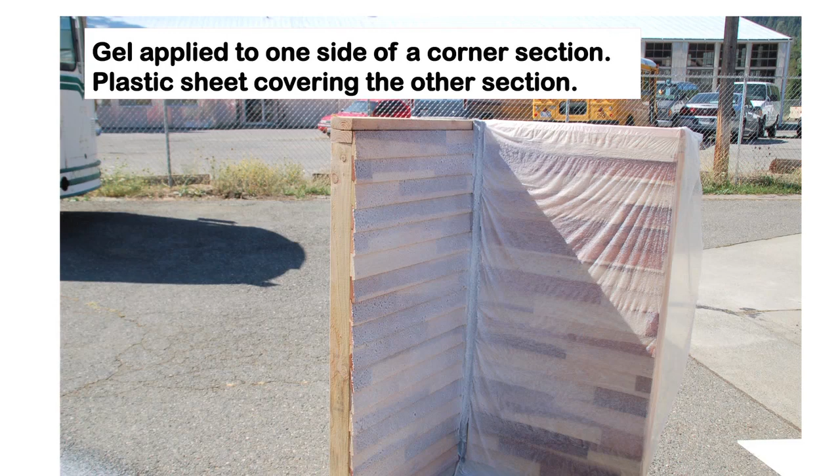So here's an example of a gel product. This is a corner section — as you've noticed, I often use corner sections in these fire demonstrations. The siding is exactly the same: a nominal 4-inch wood end-glued redwood siding pattern with a rabbeted bevel siding joint. The left-hand panel had a gel applied by the distributor, and plastic wrap covered the non-applied side so that no gel hit it. We did this early on, and a few hours later we did the test you're going to see.

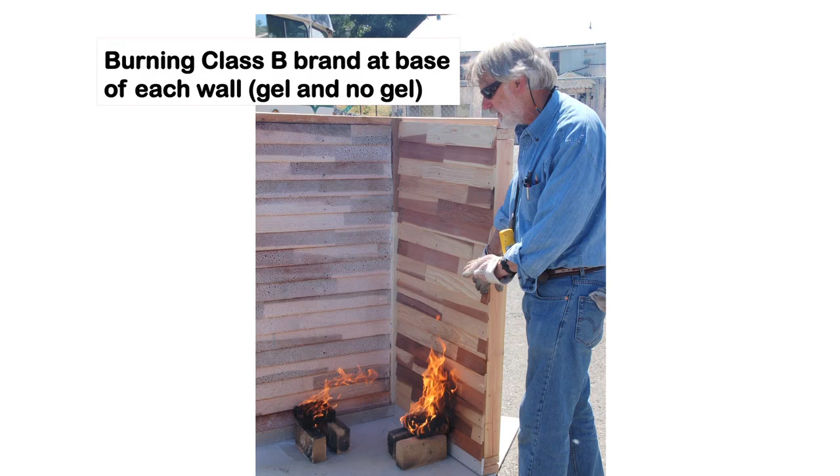In order to do the test, the plastic came off, and a burning brand went at the base of each wall. So here we are during it: Class B brand, gel-coated wall, non-gel-coated wall. Okay, this is sort of at the end of it.

The thing I noticed was that the drip edges are hard to get anyway — depending on how close you are, you can have an easier or harder time, but they missed that part of the drip edge, so it was not protected. It was low enough down that this could have been it, and down is hard to get to, but down is where you need to get. So this is one of the vulnerabilities.

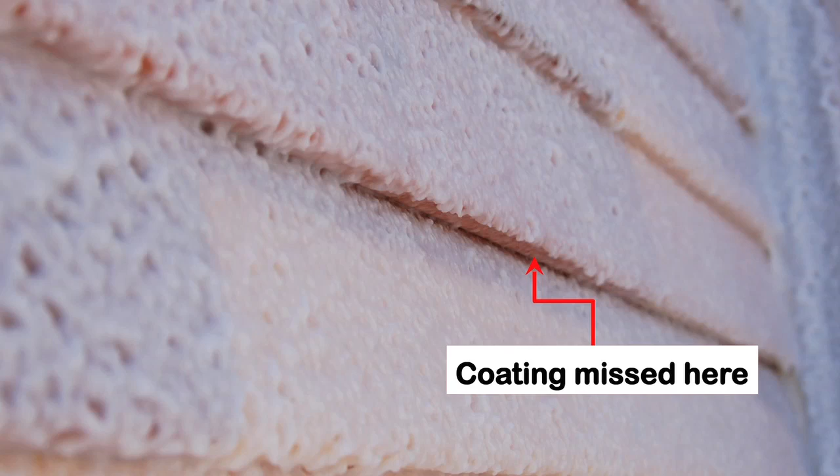So I think, personally, you can see that these products perform better than not, but they don't necessarily perform the way you want them to. If you had done clearance or careful management around near your home, you may have had the same kind of impact or effect.